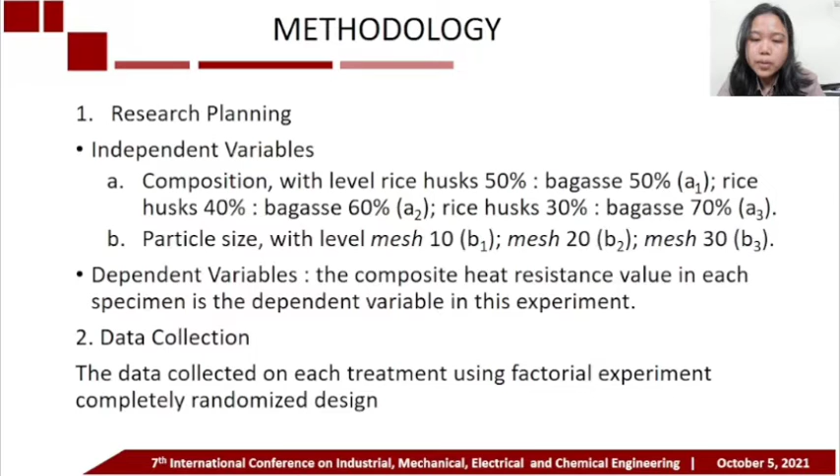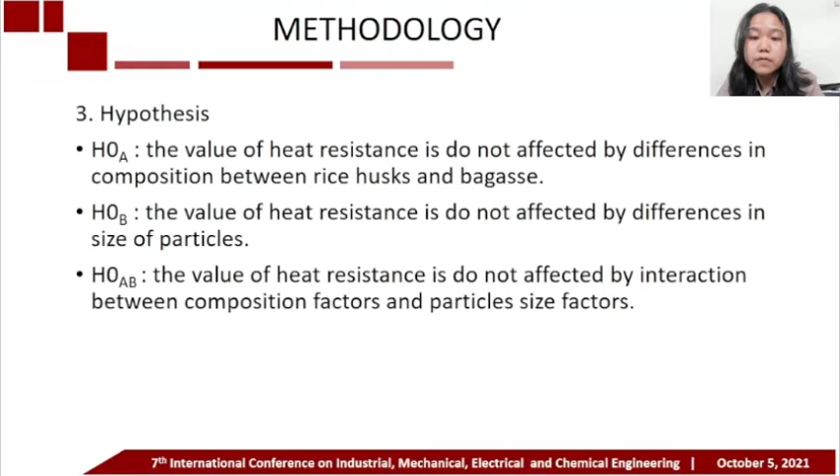The independent variables in this experiment are composition, with levels 50% rice husk with 50% bagasse, 40% rice husk with 60% bagasse, 30% rice husk and 70% bagasse, and particle size mesh 10, mesh 20, and mesh 30. The dependent variable is the heat resistance value of the composites. The hypotheses in this experiment are that the composition factors, particle size factors, and the interaction between composition and particle size factors do not affect the value of heat resistance.

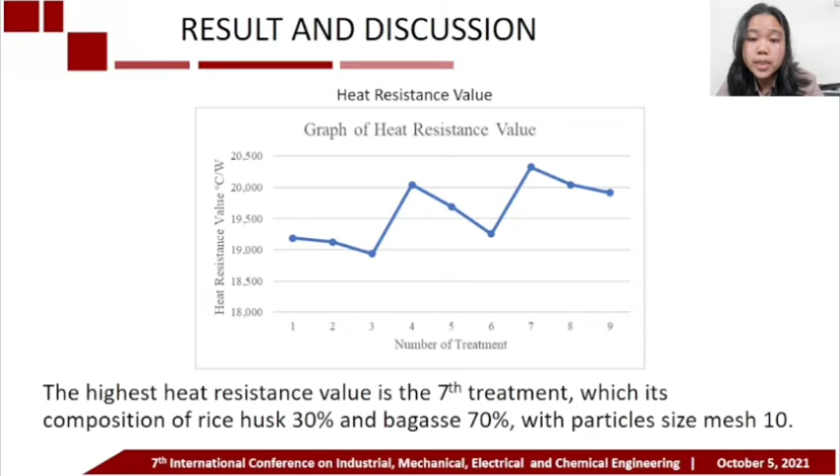This is the result of the thermal conductivity test, in watts per meter Celsius degree. The highest heat resistance value is treatment 7, which is the composite made from 30% rice husk and 70% bagasse, with particle size mesh 10. Composition with 50% rice husk and 50% bagasse gets an average value of 19.08 Celsius degree per watt. Composition with 40% rice husk and 60% bagasse gets an average value of 19.66 Celsius degree per watt. And composition with 30% rice husk and 70% bagasse gets an average value of 20.09 Celsius degree per watt.

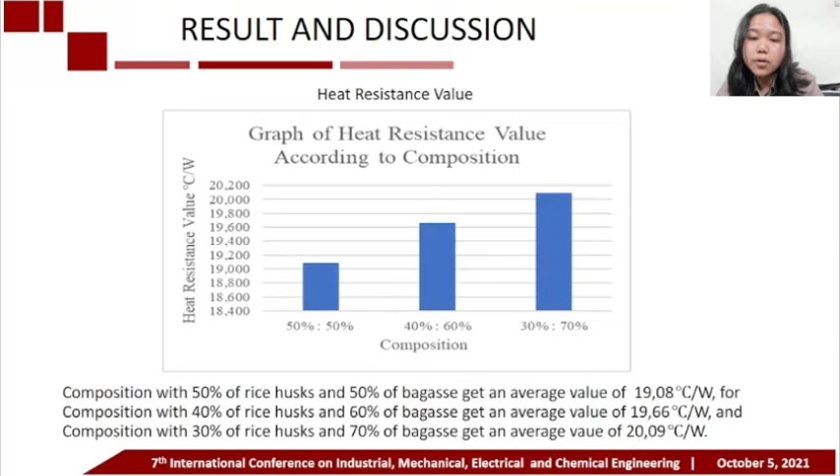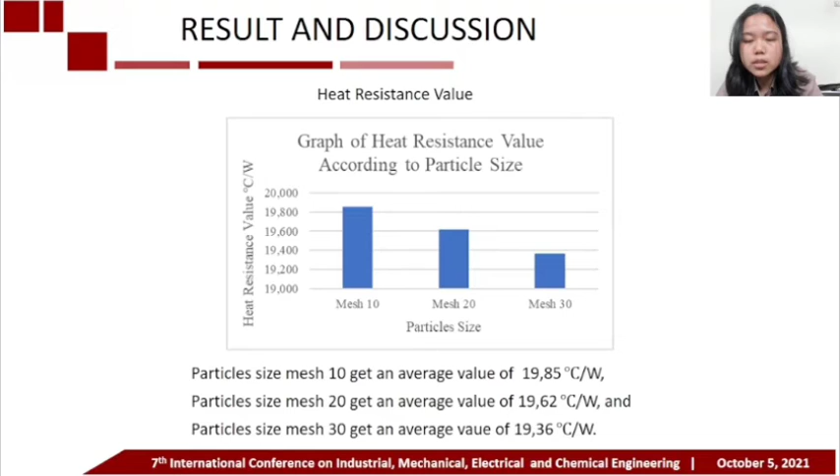Particle size mesh 10 gets an average value of 19.85 Celsius degree per watt. Particle size mesh 20 gets an average value of 19.62 Celsius degree per watt, and particle size mesh 30 gets an average value of 19.36 Celsius degree per watt. The heat resistance values that have been calculated are then tested with ANOVA, which is used to find out which factors affect the value of heat resistance. According to the ANOVA test, composition factors and particle size factors affected the heat resistance value, but the interaction between composition factors and particle size factors did not affect the heat resistance value.

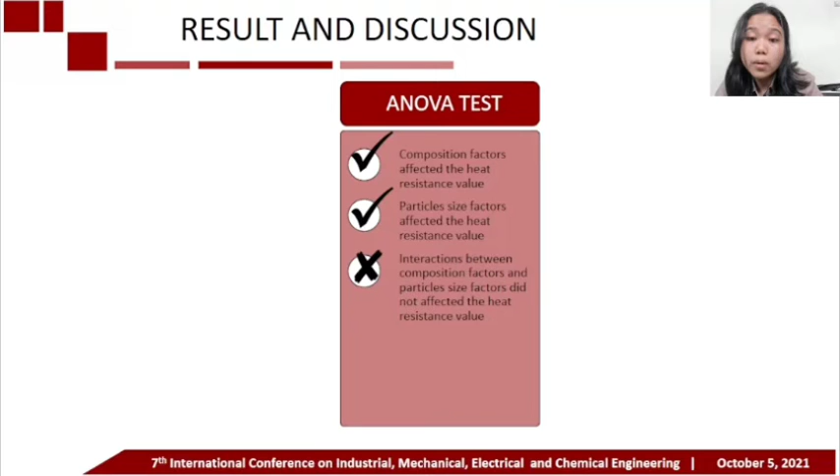Based on the result of the ANOVA test, SNK testing is carried out on composition factors and particle size factors to find out which level has the most significant effect on the value of heat resistance. The SNK test shows that the composition of 30% rice husk and 70% bagasse has a higher value among the other levels of the factor. According to Wibowo in 2008, this can happen because bagasse has higher silica of 62.78%. According to Maiwita in 2014, composites with more bagasse composition have a lower heat conductivity value, where the lower the conductivity value, the higher the value of the heat resistance.

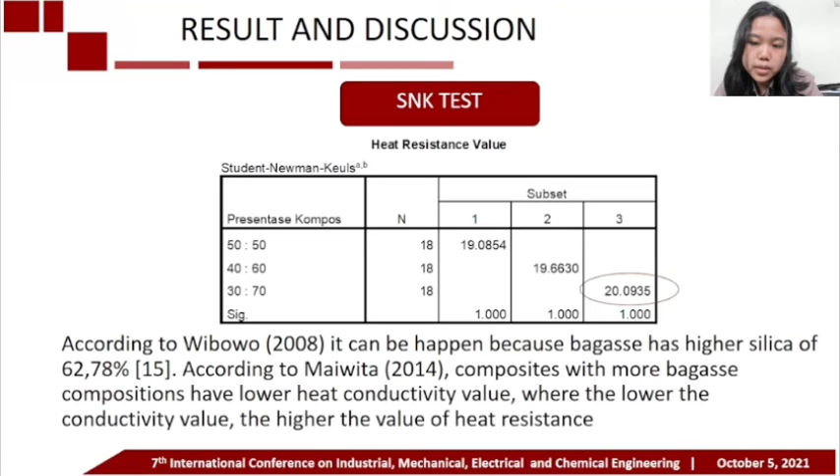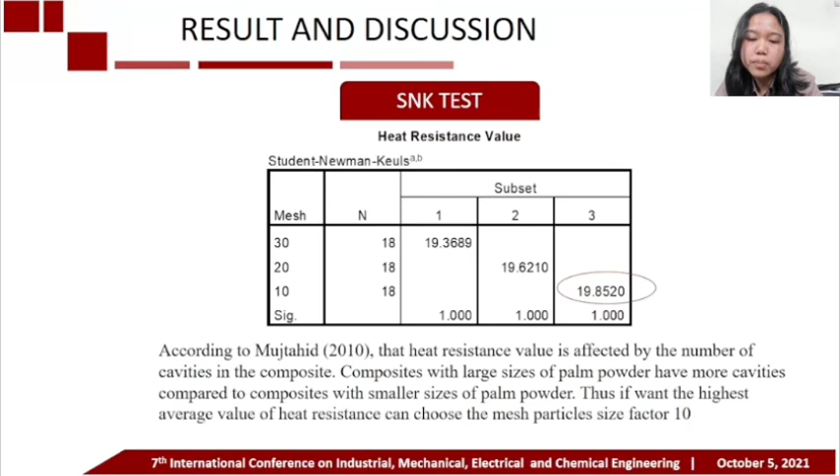The SNK shows that particle size mesh 10 has the higher value among the other levels of the factor. According to Mujtahid in 2010, the heat resistance value is affected by the number of cavities in the composites. Composites with large sizes of palm powder have more cavities compared to composites with smaller size of palm powder. Thus, if one wants the highest average value of heat resistance, one can choose particle size mesh 10.

The conclusion of the experiment is that composition factors and particle size factors affected the value of heat resistance. The interaction between composition factor and particle size factor did not affect the value of heat resistance. Since the composition factors and particle size factor affect the value of heat resistance, the SNK shows that the composition of 30% rice husk and 70% bagasse and particle size mesh 10 is the best choice to make a composite that has a high heat resistance value. The highest heat resistance value is 20.32 Celsius degree per watt, which is made from 30% rice husk and 70% bagasse with particle size mesh 10.